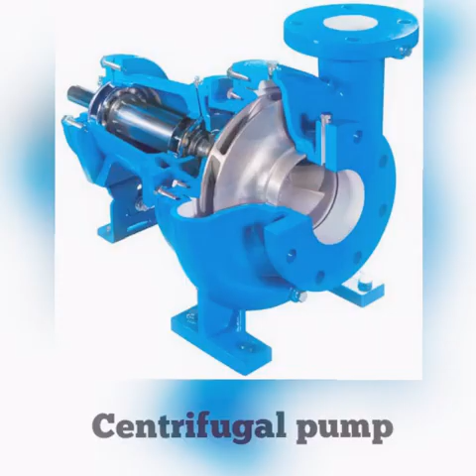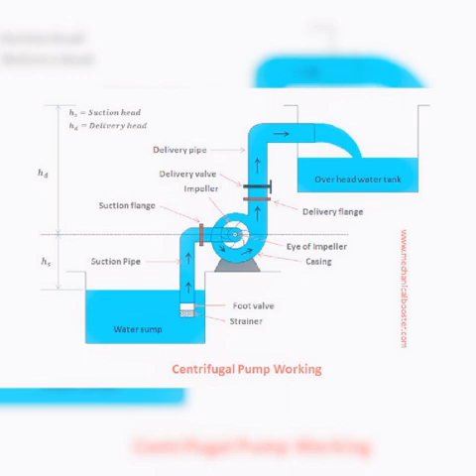We all know that pump is a hydraulic machine which converts mechanical energy into hydraulic energy. Now we are going to study about centrifugal pump. A centrifugal pump is a hydraulic machine which converts mechanical energy to hydraulic energy by means of centrifugal force. The centrifugal pump consists of the following main components: impeller, casing, suction pipe, and delivery pipe.

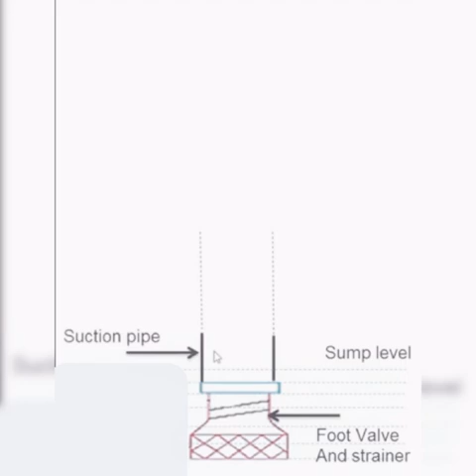Now we are going to study about the suction pipe. It carries liquid from the sump to the pump. Its lower end is dipped into the sump and upper end connected to the eye of the pump. A strainer and foot valve are connected with the lower end. The strainer keeps debris away from entering the suction pipe. The foot valve is a kind of non-return valve which does not allow the liquid to go back into the sump. To keep low velocity, the suction pipe diameter is kept more than the diameter of the delivery pipe.

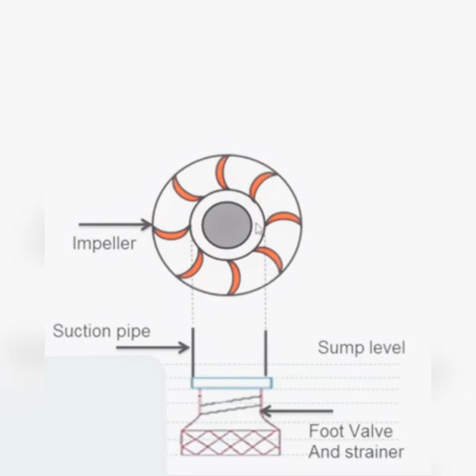The second part of the centrifugal pump is the impeller. It is a wheel or rotor which is provided with a series of backward blades. It is mounted on a shaft which is coupled to an external source of energy, that may be an electric motor or any other. It converts mechanical energy to kinetic and pressure energy. Liquid enters the impeller through the eye of the impeller. High energy liquid then enters into the pump casing.

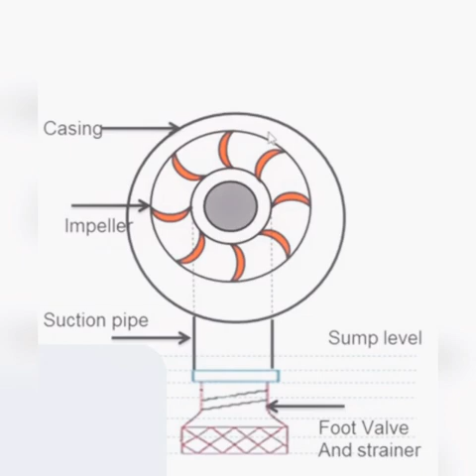The third part of the centrifugal pump is the casing. It is an airtight passage surrounding the impeller. It is designed in such a way that the kinetic energy of the water discharged at the outlet of the impeller converts into pressure energy before the water leaves the casing and enters into the delivery pipe. The material used for designing casing is cast iron and cast steel. The efficiency of the pump depends upon the casing of the pump.

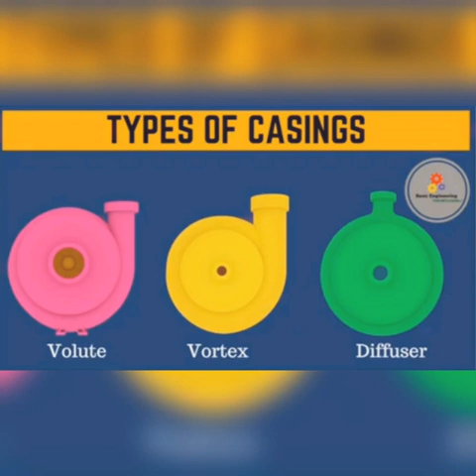The following three types of casings are commonly used. Volute casing, also known as spiral casing. The second one is vortex casing, and the third one is casing with guide blades, also known as diffuser casing.

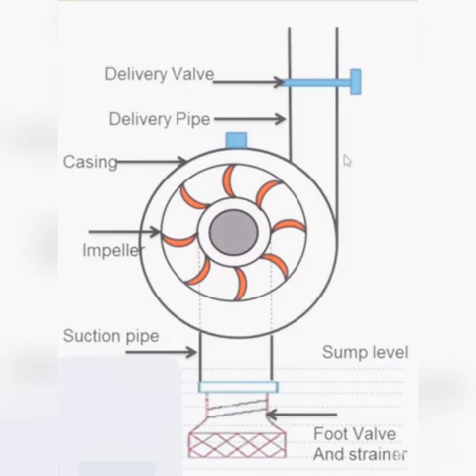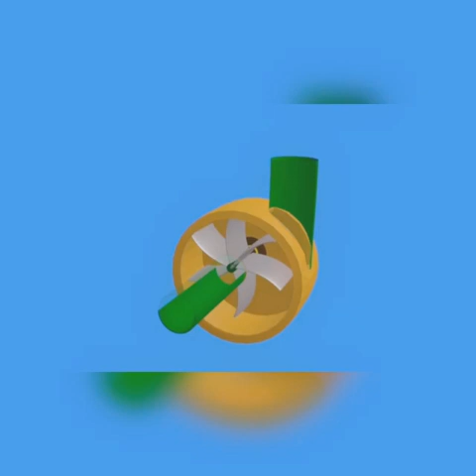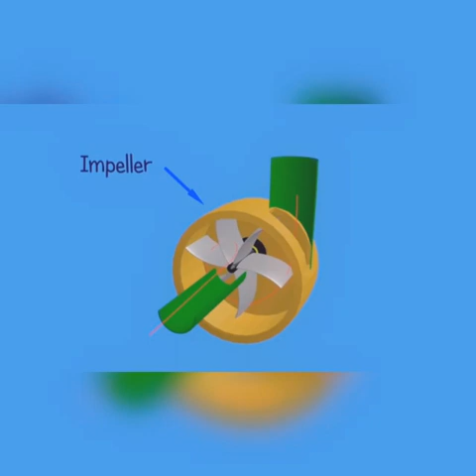Now we will see the working of the centrifugal pump. The delivery valve is closed and priming of the pump is done. Priming means to remove air bubbles from the suction and delivery pipes by filling them up with water. While the delivery valve is still closed, external energy is supplied to the pump shaft, done by coupling the shaft of the pump to the shaft of an electric motor. The delivery valve is then opened, and the liquid starts flowing into the delivery pipe.

A partial vacuum is created at the center of the eye of the impeller due to centrifugal action. The liquid rushes from the sump to the pump due to the difference of pressure at the two ends of the suction pipe. As the impeller continues to run, more and more liquid is made available to the centrifugal pump at the eye. The impeller increases the energy of the liquid and delivers it to the delivery tank. And this is about the centrifugal pump we learned.